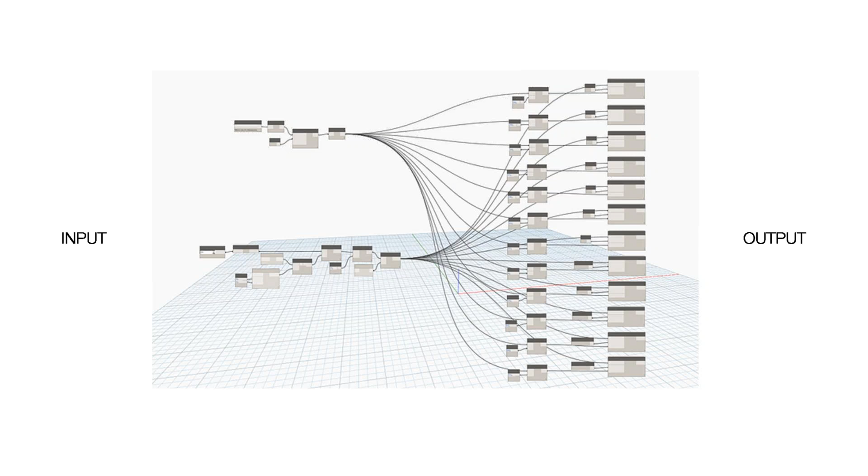So when you get to a larger graph, of course, your input then becomes the Revit model, Excel documents, whatever information you have, and then your output is actually probably the same thing, either Revit model, Excel - basically anything that can work with Dynamo is your input and your output.

So the first topic we're going to talk about is advanced strategies. This is one of our groups here. I think they're mostly in St. Louis. I don't think there's any in Chicago.

They are primarily focused on helping clients know what they want. They go in and interview everyone in an office, find out their patterns, and figure out how much space someone really needs - if they need individual spaces or if they need collaborative spaces. They go through and do a really, really good job.

Sometimes they're walking around a building once every hour. They have to get around the entire building, and then they make these giant graphs and all this fun stuff. They don't use AutoCAD at all, but they've recently started learning Revit, and now we're introducing Dynamo into that as well. We'll get into some of what we're doing for them.

They're probably one of our largest growing segments. I think two years ago they had probably two people, and now they're at 10 to 12. But then they hire temporary people to go out and do all the data acquisition. So when they have a job, they'll hire 10 people to work for two weeks.

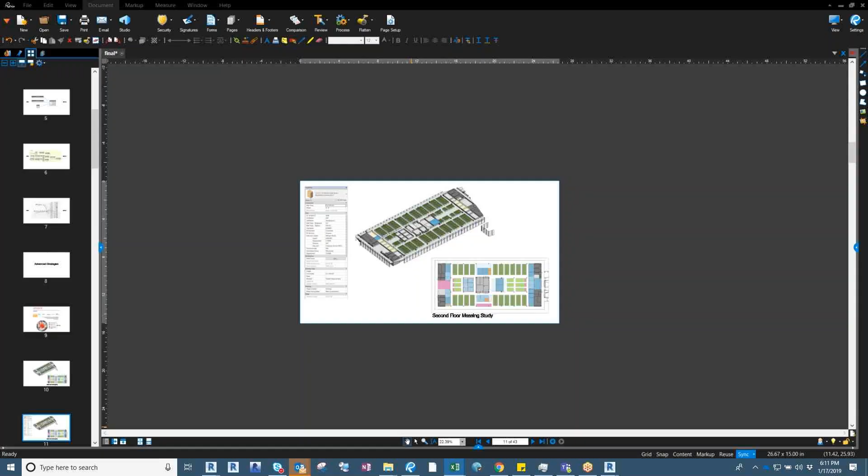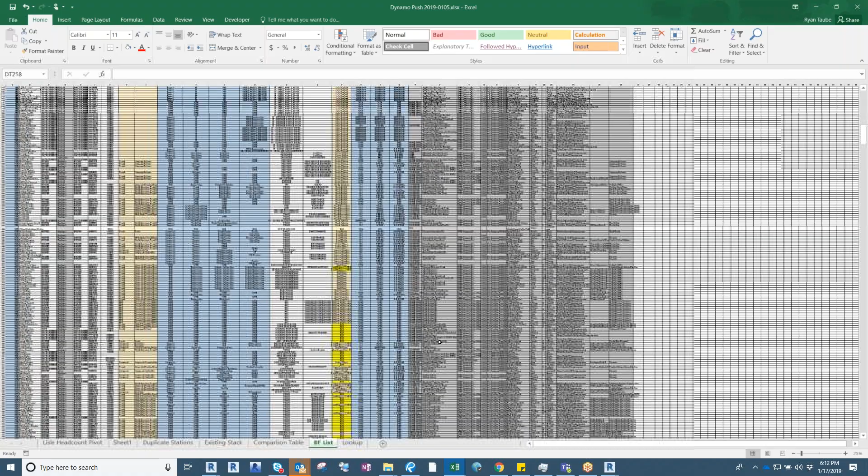It is super long. If I zoom out in Excel and get to the width, I still have to scroll quite a bit just to get all the employees for this. This information - I think on this one they hired about 20 people, and they went through and went to each office and typed in information on each person. So these are all temporary people that were hired to do data input in the field.

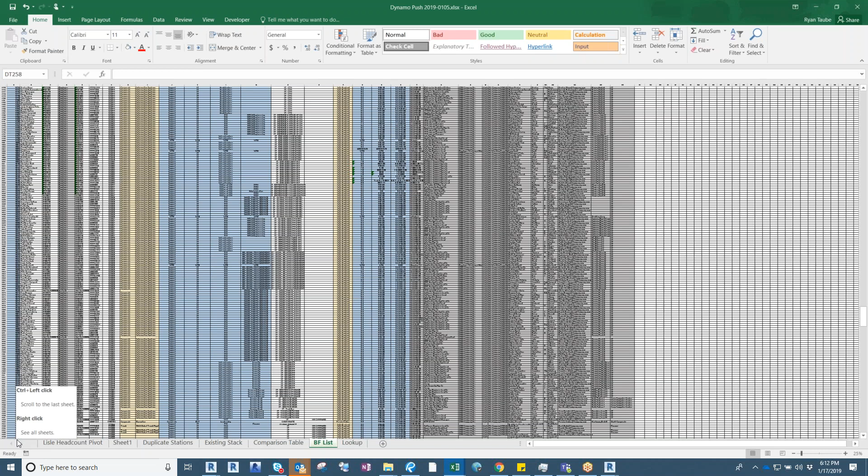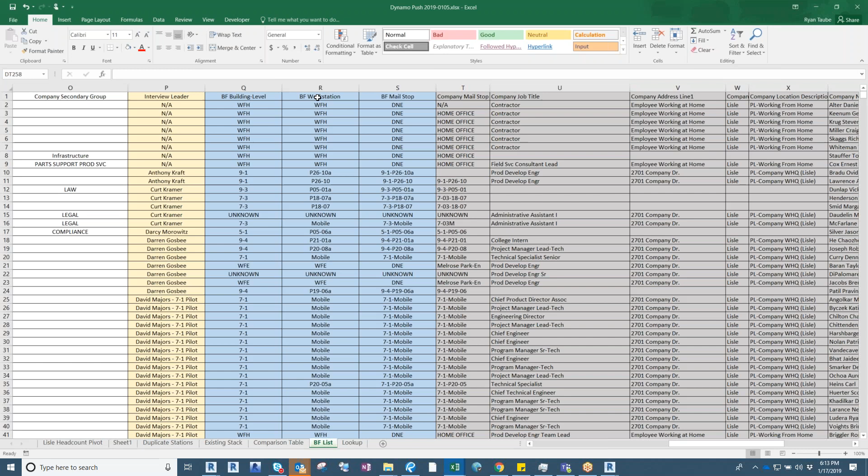That in itself is a whole different puzzle that I don't really understand, because there's a verification process and all that fun stuff. But at the end of the day, let me see if I can get back to my top here. So you have addresses and locations and interview leaders and building levels and business divisions and primary departments and all that stuff, which is a lot of data that you can work with, but it's a lot of data to acquire and a lot of data to work with in Revit.

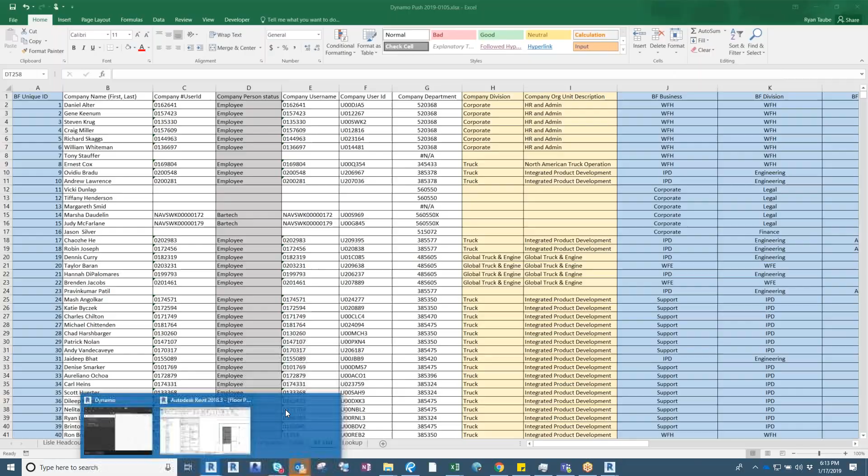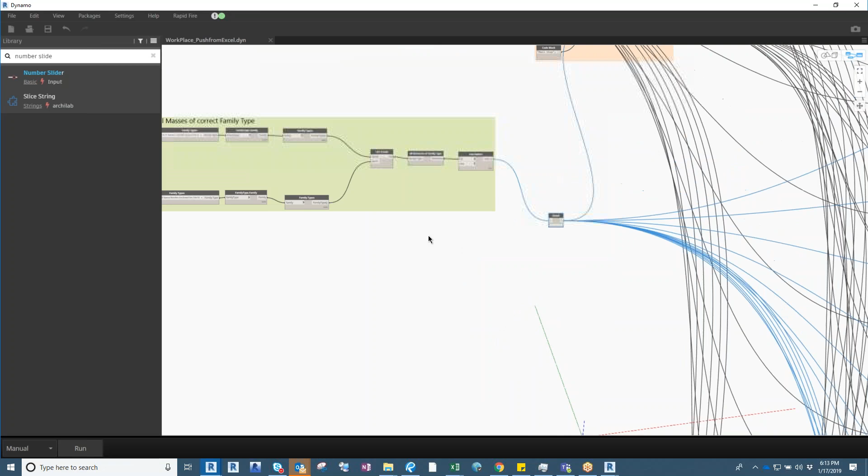So the Dynamo script is actually really light. We only pushed this much data - this is 12-ish columns that were from that schedule. And this is really my first attempt at learning where is it located...

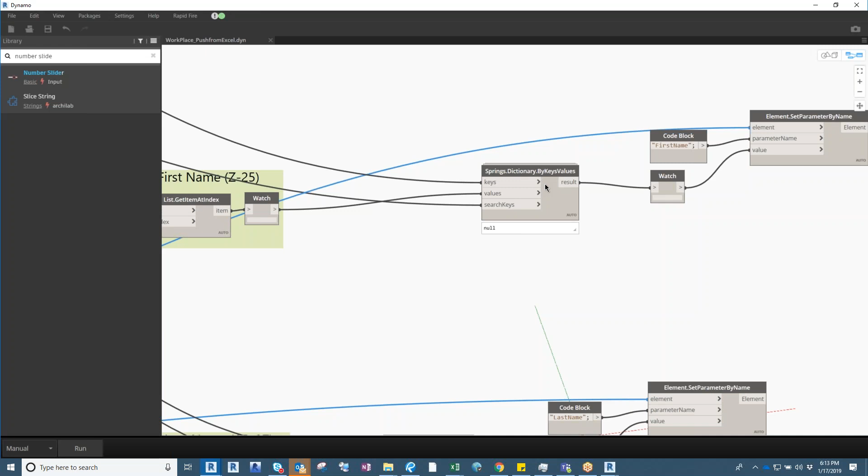Using - this is actually Spring Nodes, their Dictionary by Keys. If you haven't done Excel pushes to Revit, this is a really powerful node because all you need is a key value that's the same in both Revit and Excel. Once you do that, all the information basically flows through that key.

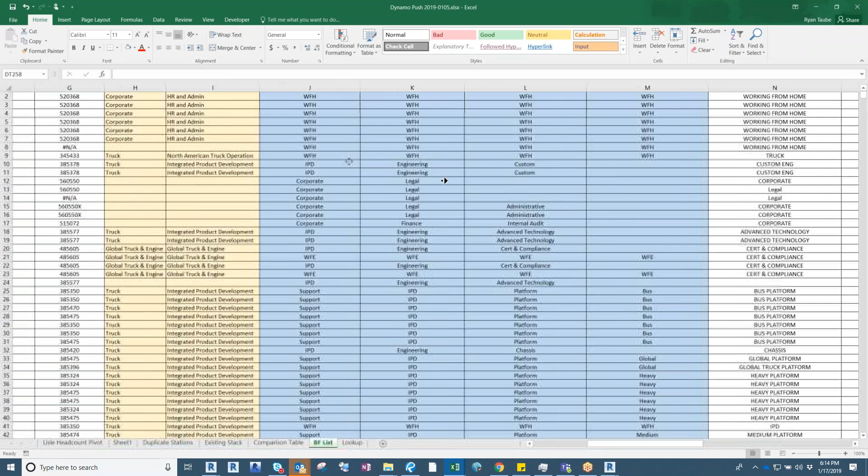So we had someone in our office that went through that - one of the things that was nice, there was a CAD drawing we could underlay, and it had all the mail stops basically. That's the unique user ID that we used - that was our key. And that key exists on the Excel spreadsheet somewhere - I believe it's this one right here. So that mail stop, it's something we created because it's a combination of building level and workstation. And we had a CAD drawing.

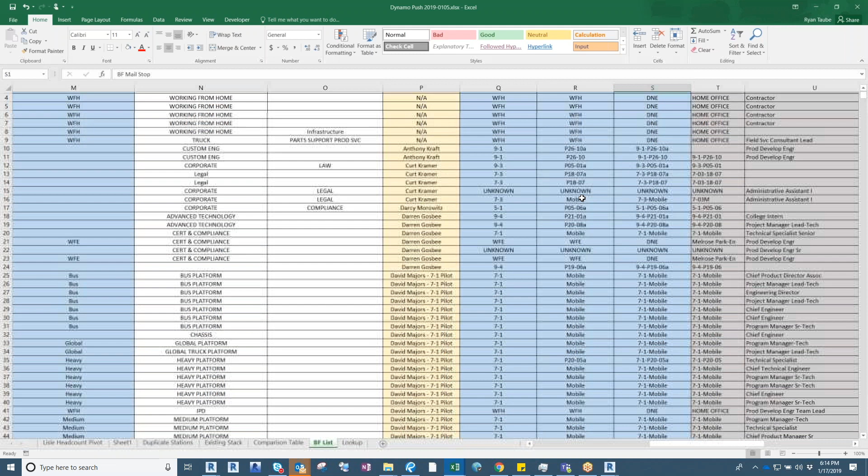So we created a family in Revit, and then... sometimes I get annoyed when Dynamo is always on top.

So someone populated one node in all these boxes and then pushed 15 other pieces of data into it, as long as they can get that one key connection.

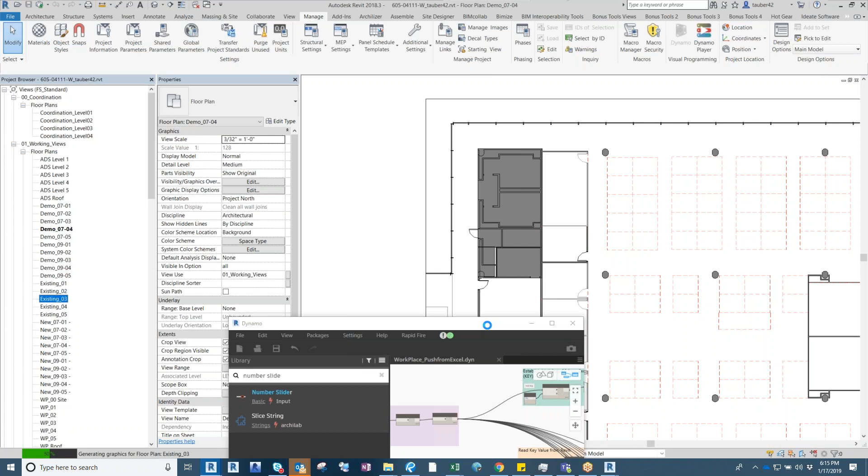For Revit, is this 1.3? This is 2.0. You have the Springs package in it? I have the Springs package in it, yeah. I thought that was, is Springs different than Spring Nodes? I think it's the same. I think Spring Nodes is the same.

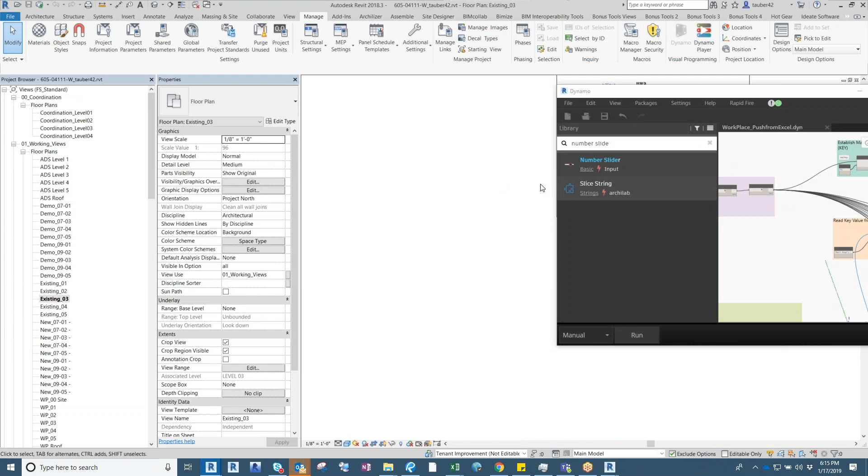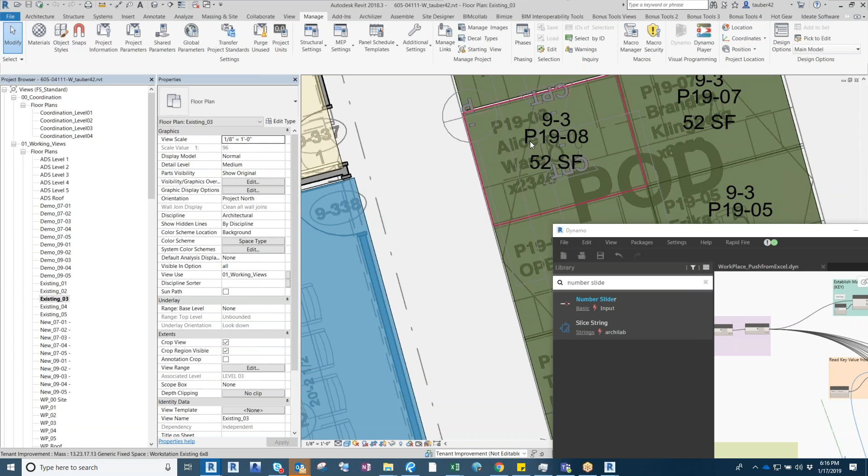Yeah, I'm having trouble navigating here, but it is just a massive amount of information. The CAD drawing underlay has their phone number, their name, and the mail stop, but it doesn't include which level they're on. So we had to first run a script that combined the level with the mail stop, and that created the official key.

And then from that key, we could start pushing all this information. So really, once you do it for one, you can do it for others. So this is all that you really had to do in Dynamo to push that much information in there.

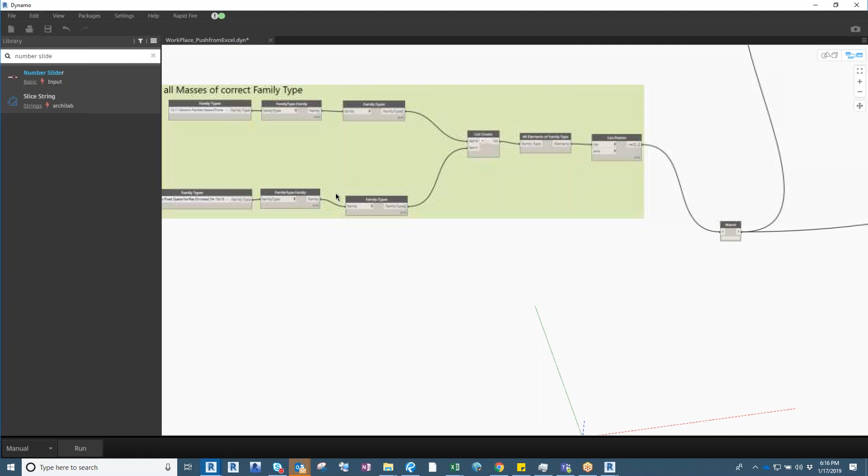So when I'm building stuff, I try to accurately describe what you're doing in each group. I use caps if it's an action, so like select, create, all that stuff for my groups.

Bringing data from Excel, again just some basic Dynamo stuff, and then acquiring the key that's in that Excel file, reading the key from Revit, and then pushing everything through this node. It just looks for the match, and then it loads the rest of the columns.

And that saved them. I mean, they probably couldn't even do this project otherwise. We kind of played with it on a previous project that had 200 people. It would probably take them a day of data entry to make a Revit model for it. So we'd actually played with the Revit part before, and they're like, all right, what are we going to do now with 3,000 people instead of 200 people?

So this is kind of the progression of how this process came to be. This is the first time this group of people used Revit, probably 6 months ago. They definitely never used Dynamo before.

The nice thing with having all these different companies working with us and various groups is that we can make inroads in places we would never really think about before. Even with our designers, they don't really use Dynamo right now because they kind of know what they want to do and how to do it. But with people that don't really know how to use Revit or Dynamo, it's an option, and then it kind of goes from there.

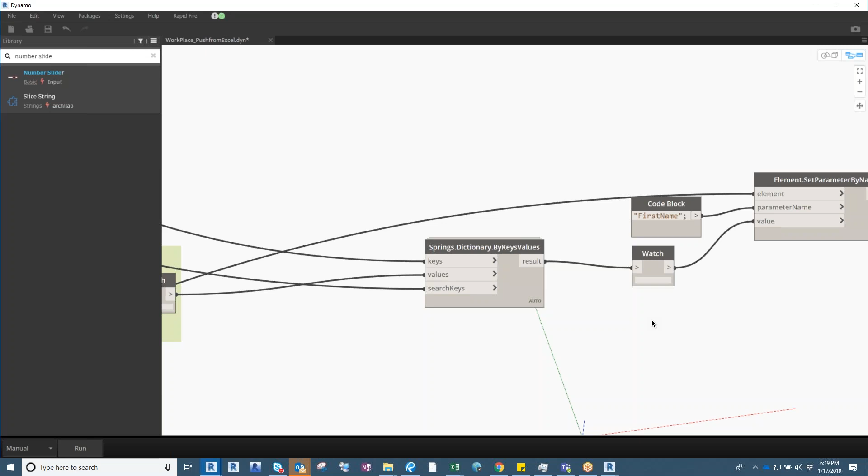I find Dynamo very helpful, and running scripts off of Clarity. You can run Dynamo scripts inside of Clarity on a regular basis to give you lots of information. The other thing we can start to do is tie that information to Power BI. So those are kind of the 4 different ways that we're using Dynamo at this point.

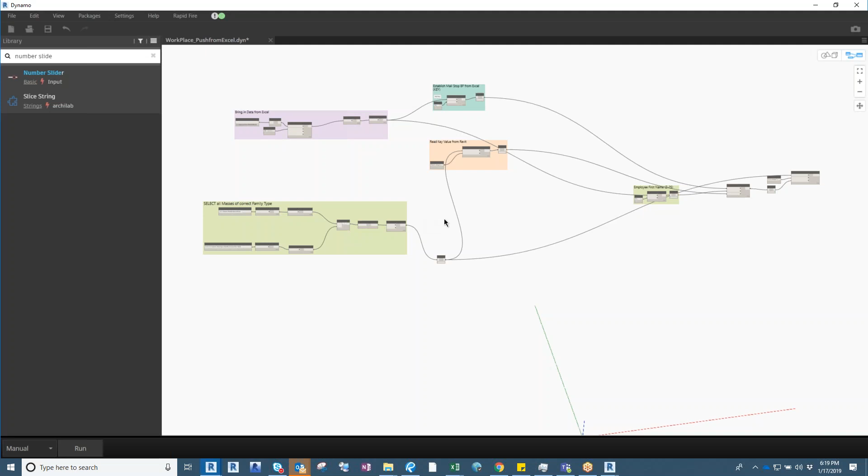So yeah, this is kind of a basic script, but it was a lifesaver. I don't think they would have been able to use it in the way they wanted to, really any model geometry, if they didn't have this.

Why do you have that watch node?

That's a good question, as far as organization goes. There's a way - we'll talk about it in the next script.

Watch nodes, and I also use code blocks to pass information through. Watch nodes are great because I can right click on this and freeze it. If I have a watch node where information is going through, I can freeze that watch node, and it basically freezes everything downstream. So I'll create pass-through nodes where all my information is getting collected as the input, and it goes through a block, then into the output side, and I can freeze that node, and it just freezes everything downstream. But if it's going into a group, you can't freeze that and control it as easily.

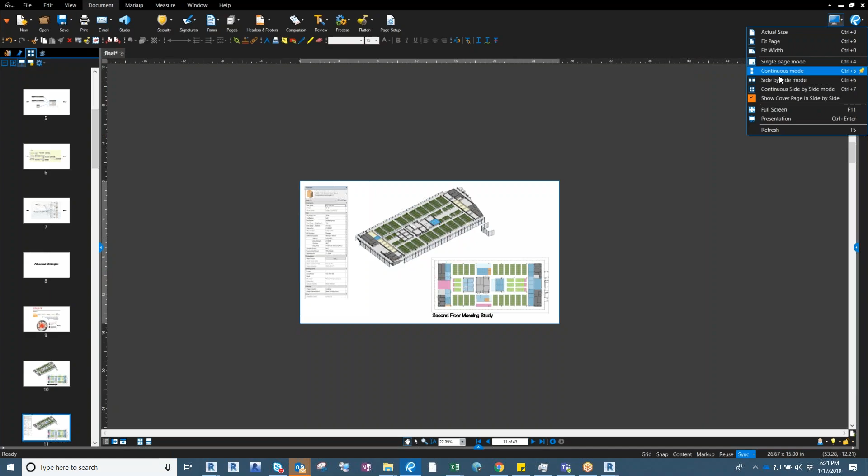So I'll throw watch nodes in, and rather than just have it sitting off to the side just to look at information, I'll pass through it so it stops things. I refer to that as an extension cord - if you think about an extension cord, you just pull the plug or plug it in. It's a convenient way, also really useful when your graph is really long and you're constantly scrolling back and forth to pull that wire from over here to over here. So I'll just put a watch or a code node, that's an extension cord to get that output to some other part of the graph where it's more convenient. For both of those reasons, it feels like an extension cord, like plugging your slides together.

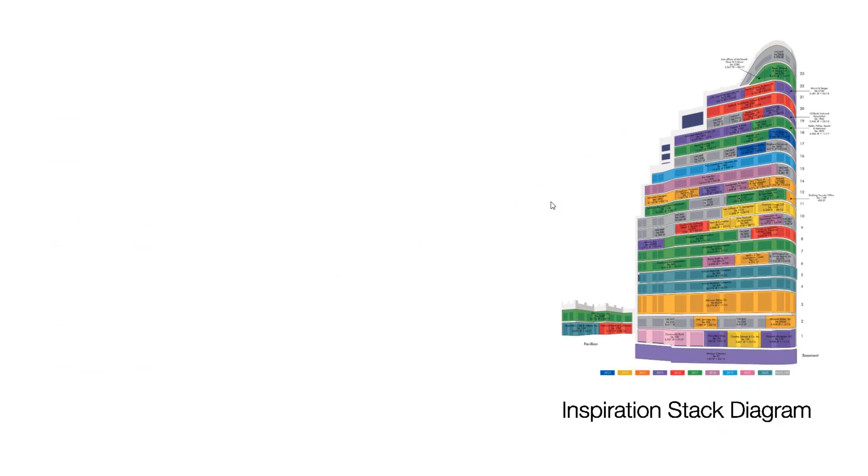So on this one, what was kind of the outcome or deliverable? Was it just a model with the data? Yeah, so it's model and data, and what they're trying to get to, this is like their inspiration - she's like, I want something like this, I want to see in color the different departments. This is not ours, by the way, this is inspiration.

What we actually output was some very simple colored graphics, because we're trying to acquire how much space people actually need, and then we could create other massing that equals that space. It's not quite as easy as saying, okay, we have 600 square feet of this, then go create me a box that has 600 square feet and place it where I need it to be. Basically, we output a bunch of information of what we had.

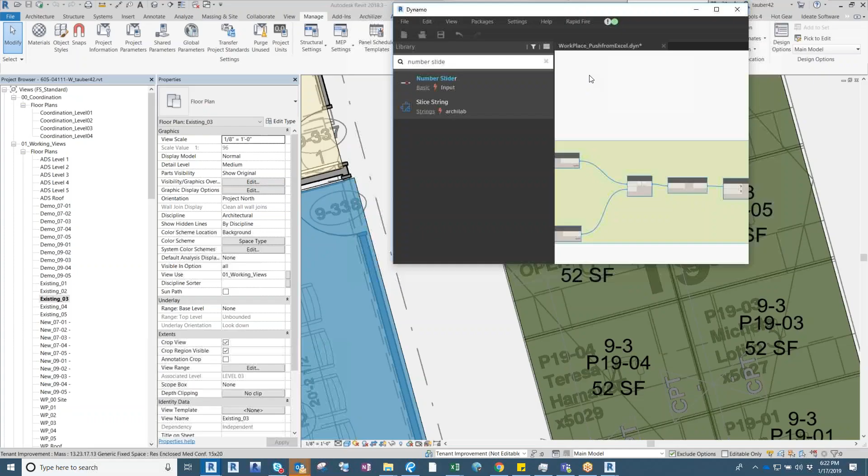If I go back to Revit, one of the big outputs was scheduling. So they had schedules - this is level 5, and here's the different space types, here's what type of room it is, here's how many of those they have, here's the family type so we know what the size is, and then the seat count. So some of these boxes had 4 seats in it, and how much square footage is in it.

Again, very beginner steps for people that don't really use Revit - they're still learning how to use it. Also, schedules is a really good way to introduce Revit to people, we'll talk about that when we get to landscape. With Workplace, or Advanced Strategies, it was a really good way for them to get some scheduling output.

They're very well versed on how to use VLOOKUP on Excel and pull that information, but learning how to do it in Revit and then manipulate things here is slightly different. They could do it a little quicker for some things in Revit, and then they do some things in Excel. Again, it's like pulling information from lots of sources and being able to utilize it.

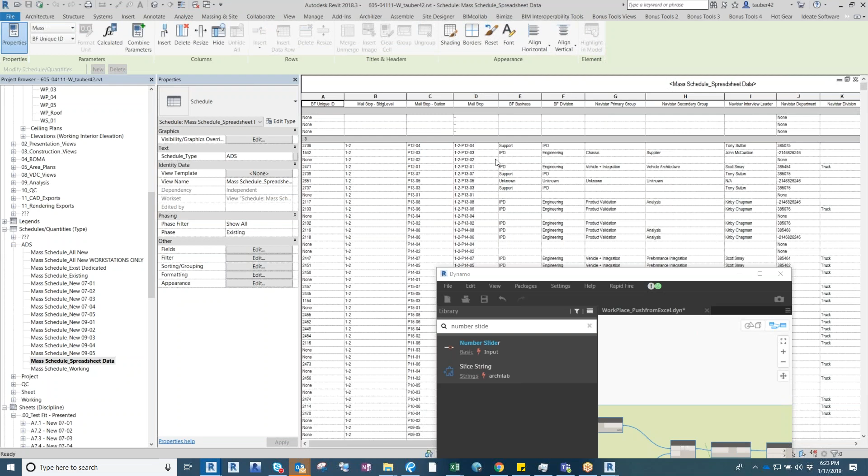Let's see if there's any other - how much of a time savings? I think with this, they couldn't have done it without it. Probably 2 weeks is what she threw at me, was the amount of information they would have spent doing it, and they didn't have that time. Their deadline was like in a week to do it.

So we spent probably a day trying to figure out how to get it, and then I told them what I needed. They spent a day setting up the Revit model to get those mail stops ready. Then while I was working on the Dynamo script, they gave me a temporary Excel file, and it worked on the first time. So that was actually unique for Dynamo.

How long did it take to run? It actually goes really quick, probably 30 seconds. So for 3,000 units, 15 bits of data, it was actually really quick - I was surprised. It's assigning parameters, it's not creating any. It was assigning values to parameters, not creating the parameters themselves.

So those were things that were already in the model. Yeah, so I went through and created the families that had parameters, so we had a whole shared parameters file for them. She actually now can create shared parameters.

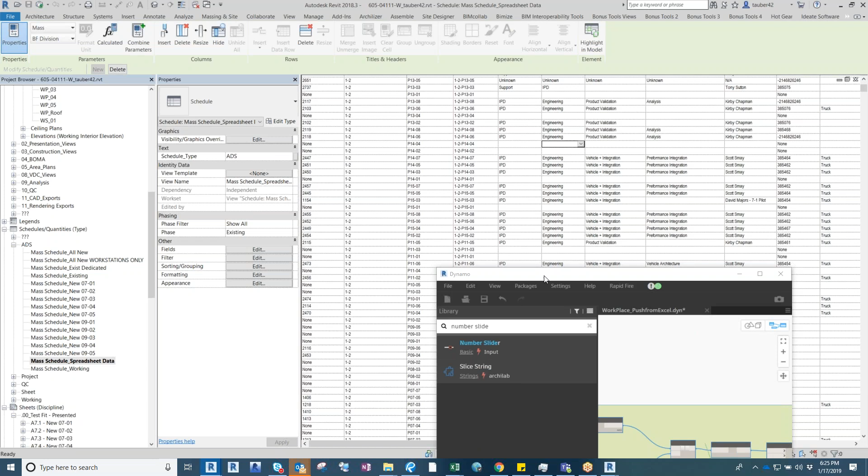So 2 weeks later, she came back and said, I've added these parameters, can we run the script again? So I went through and just copied this down, changed the column that we were adding, ran it, and it was done in an hour. From when she originally asked it, we had it ready to go. So it's now become a back and forth thing - we can add things, push it in. The workflow's actually pretty good.

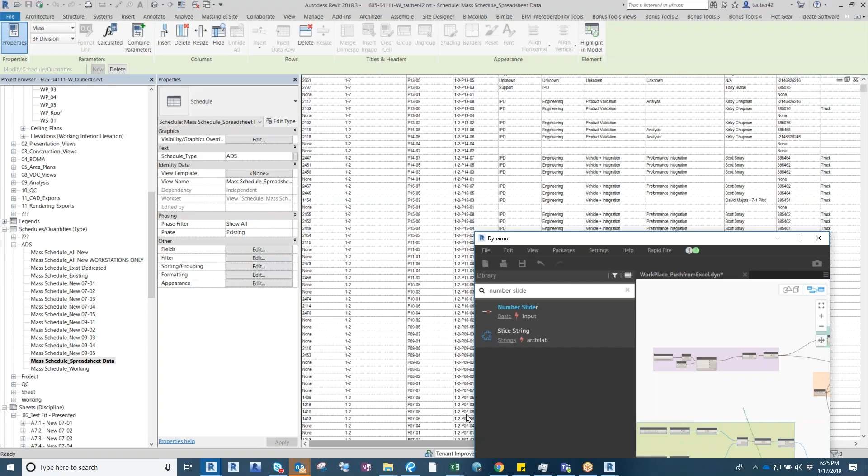So landscape, urban planning, these two are landscape. They do a lot of good stuff, a lot here in Chicago. This is actually Fort Wayne - we're doing a whole riverfront development. And as you can see, a lot of it is Photoshop coloring, CAD drawings.

And that's very typical for landscape across the country. We found one person that writes blogs on landscape for Revit, Lauren Schmidt, I believe. Very good tutorials - she presents at AU, and she presented at BILT this year, so I had a good chance to talk to her. Sophia, who's not here tonight, absolutely loves her, reads all her stuff, and Sophia has kind of been the driving force.

These two, Jesse and Jameson, are getting there - you guys are both using Revit. So we introduced Revit to landscape about a year ago, maybe a year and a half ago. Our landscape department is about 15 people, 3 here in Chicago, 12 in St. Louis. Historically, everyone's CAD, except for one person in St. Louis - he's been using Revit since I arrived about 4 years ago.

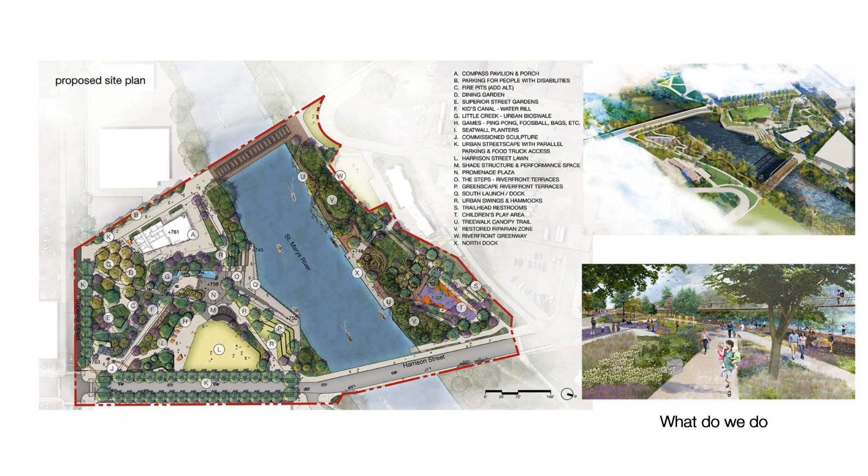We introduced it to Sophia and Jesse about a year ago when we were training Revit, and you guys fell in love with the scheduling, I think was the key. So we started creating templates and getting all that stuff to kind of overcome some of the hardships of using landscape in Revit. There's still some hardships with using it, and we're going to talk about our most recent addition to that, which I don't even think you guys are using yet, but we're going to use it soon.

So this is just kind of some examples - these are 2 different projects, but this is an actual Revit model and then taken through Photoshop. This is kind of how things look in Revit. So if there's a shrub or something, we'll draw some floors, we'll get the right height in there, and then we'll offset it to kind of give you a rough estimate of what things are going to look like. We don't really have 3-dimensional trees yet, although we've been talking about getting some things - we can kind of talk about that in a little bit.

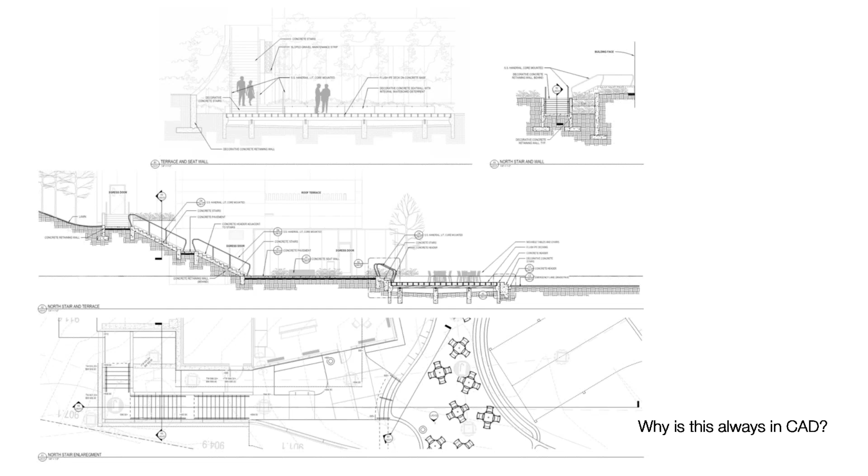Yeah, so one of the big challenges is that it's always in CAD, and it's because we have a lot of details in CAD. I think landscape people think in CAD a lot better. The GIS is obviously a CAD-based program, and everyone has a lot of knowledge with that. And what we found is quantification is a lot easier in Revit.

So counting trees, counting areas of floors, obviously - we do all of our sod and shrubs and basically all of our smaller plantings as floors. We're not quite to the level of Lauren Schmidt where we are using Dynamo to drape floors over topography, but we're getting there. I think as soon as they learn Dynamo, then we're going to get there, because I think Sophia's probably going to try to start learning that soon, but that's a little bit more complicated. Right now we're just doing flat floors and trying to get the heights right, and because we also have soils and irrigation and all that stuff.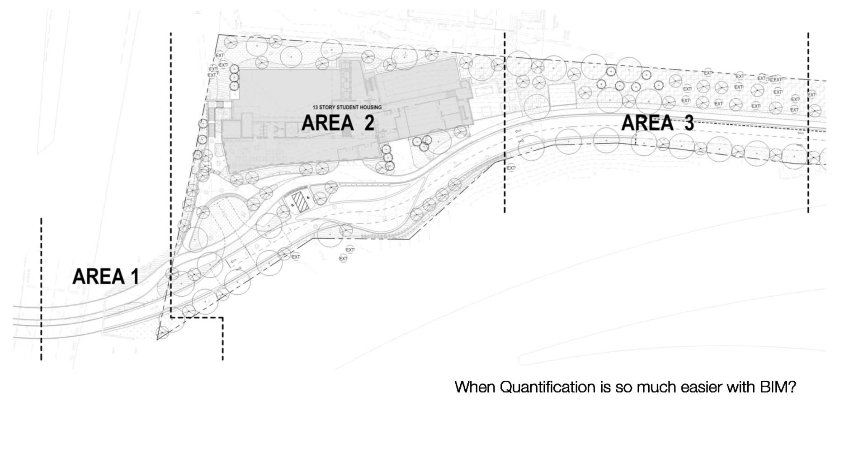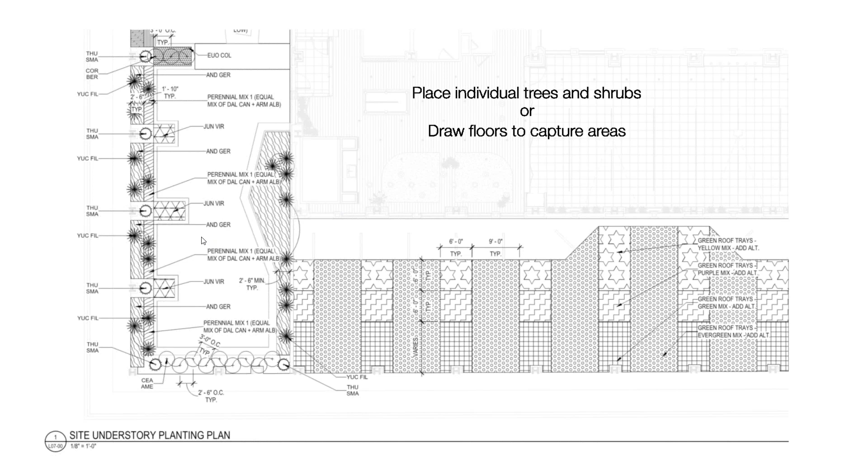We're not doing layers within the floors - we're actually doing separate floors. So if a soil is going across the whole site, we'll just model that whole thing rather than try to build layers within it. And we'll kind of see why here when we get into the Dynamo script. But yeah, we're scheduling things, quantifying individual shrubs and trees, and then drawing floors to capture those areas.

But what do you do when you have 200 plant types and you have to create a floor for each, or you have a bunch of different shrubs? Do we build a template with all of those already pre-built, which is kind of what we had started doing? And the problem we had was building it for each project, where we would import the different symbols and botanical names, cultivars, common names. I mean, there's a lot of information that goes into landscape design.

And just to show you one of these folders that we have, these files, we have a master list that one of the guys in St. Louis has been kind of building his entire life, that we've now taken and expanded upon.

There's different types of the same thing with different cultivars, different common names. They all have a height value, a spread value, and spacing. When you're doing areas, you kind of need a multiplier. If the spacing is one foot on center, then your multiplier is 1. That makes it easy. So if we can have that multiplier in Excel, then we can maintain consistency as people start modeling this in Revit.

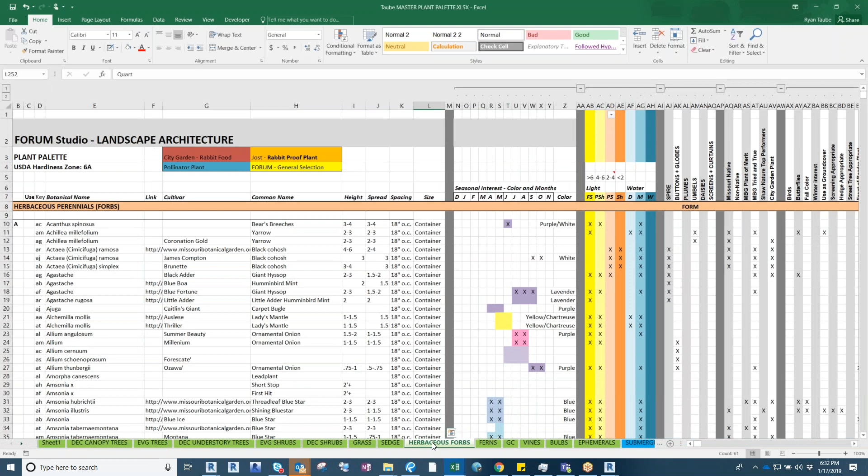But one of the things that we also have, let's go back to the canopy trees, is that this is expandable. So we have the time of year and what color the tree is at that time. It's insane how much information's in here.

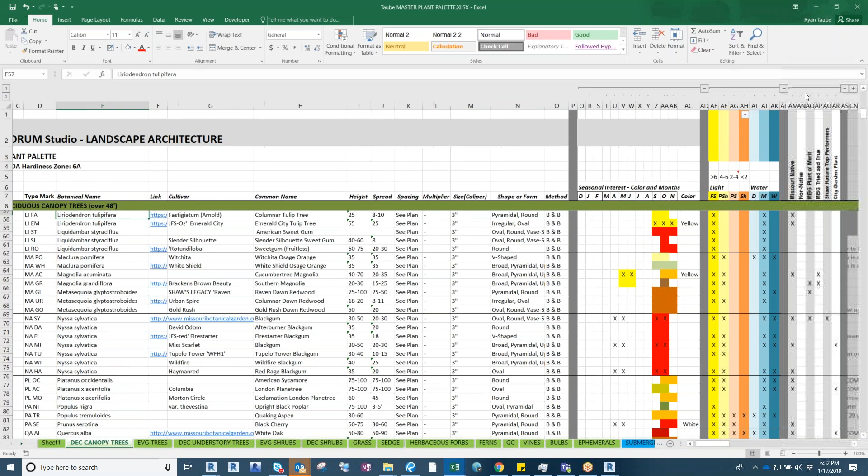This is like the water usage. Is it partial shade, full shade? And then we have just lots of little bits of information. So is it Missouri native? This guy was based in St. Louis. Is it good for birds and butterflies?

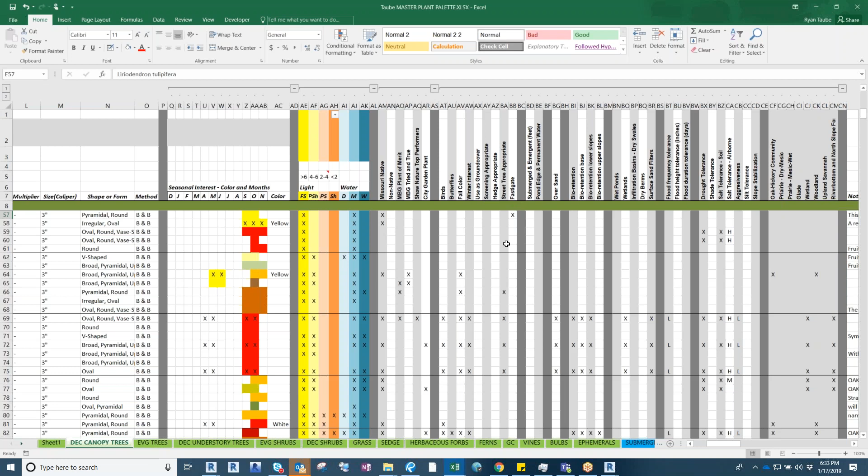So like stuff they'll look up and stuff they kind of want to review as they're picking trees. There's a lot of information here. Now, what I'm using it for really, I only need this information, because this is what I'm actually pushing through. But maybe down the road we'll use the coloring and that kind of stuff for something else that we'll talk about in a second.

This is probably the biggest reason why landscape architects don't love it. To build all that from scratch takes forever. Yeah, it's just absolutely forever. I mean, there's a lot of research.

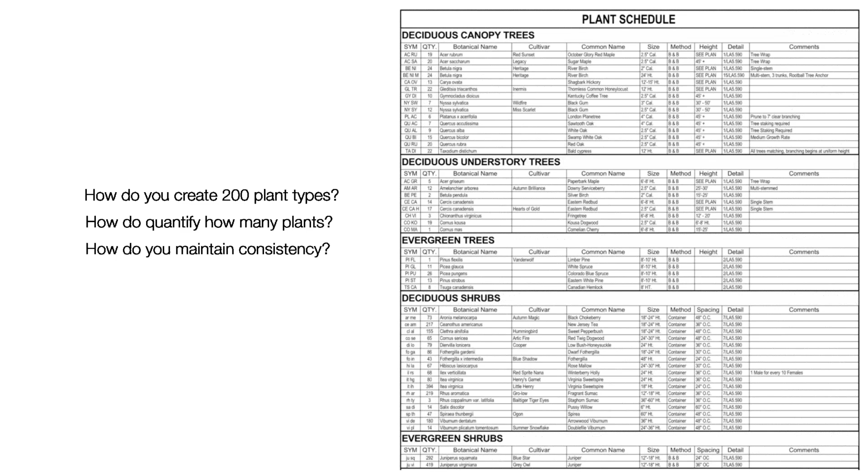So yeah, there's a lot of information here to utilize, and how do we utilize that? So let's get this back up. Yeah, consistency. So if we're inputting things in Revit and you misspell something, that's an issue. So if we can push this information in, it's obviously going to maintain consistency. One of the other things that we had, the consistency and all that stuff, I'll jump into Revit really quick and show you actually what's being the result.

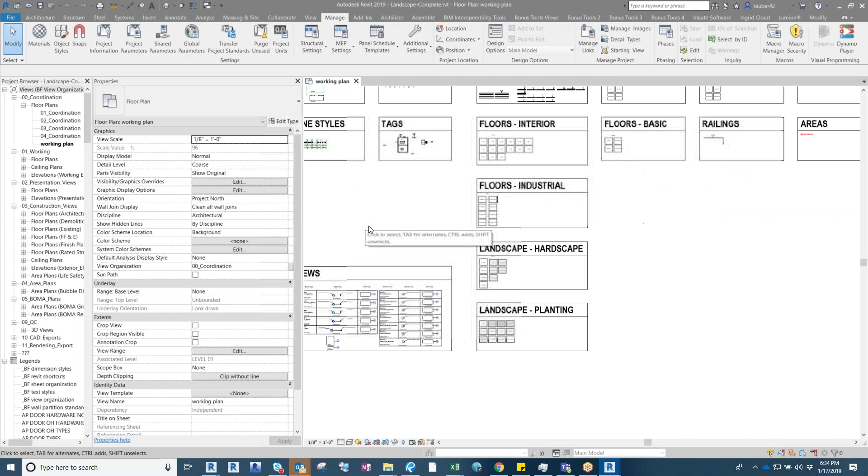So this is a look at our 2019 template as we're kind of putting things together. So we'll have all of our floor types. This is probably going to get parsed out into different templates, but I'm just trying to keep everything together. So annotation, symbols, all that fun stuff. The focus of this is on landscape.

So we have a floor type for annuals, bulbs, vines, shrubs, ornamental grasses, sod, perennials, and planting mixes. So they each have different hatches. So when you model them, you can get a site plan that you can differentiate and tag and get areas from.

Let's see, 2019. The script that we ran is a little bit different because it's just reading from Excel and then bringing information in. And it's asking which plants do I want.

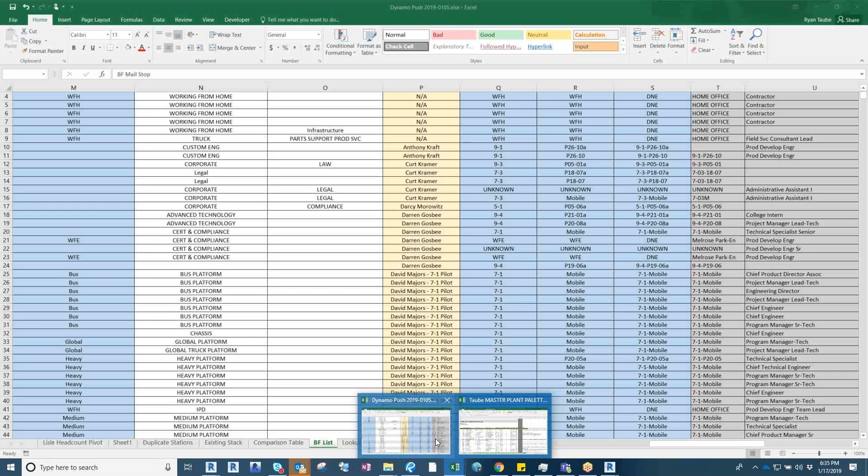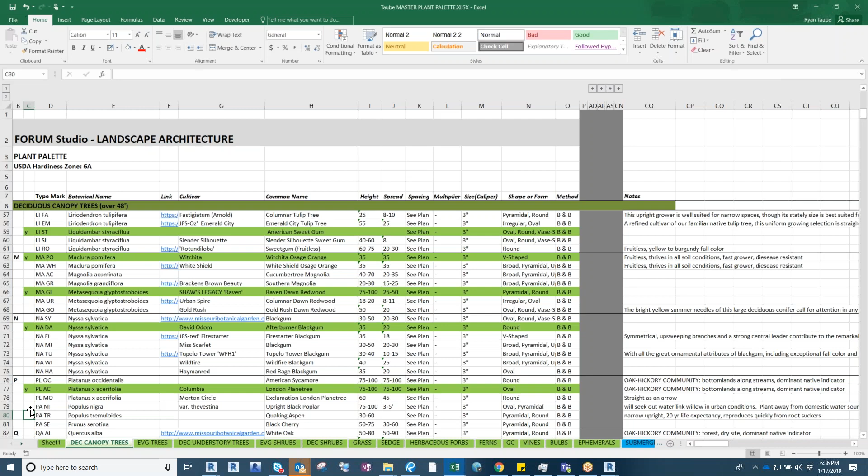So the goal that we're going to have is that I come through this list and fill this parameter in and say I want that plant and that plant and that plant. And in Excel, it's highlighting so that you can visually see what we want. I already have some selected here. So they just turn green for what we want.

And then when we come over to Revit, it's going to duplicate an existing generic floor and then create another floor type and push all the information from that Excel sheet into it. So it gathers the data from the type mark and it's filtered based on that yes parameter, and then it's creating a new floor type, duplicating from this one.

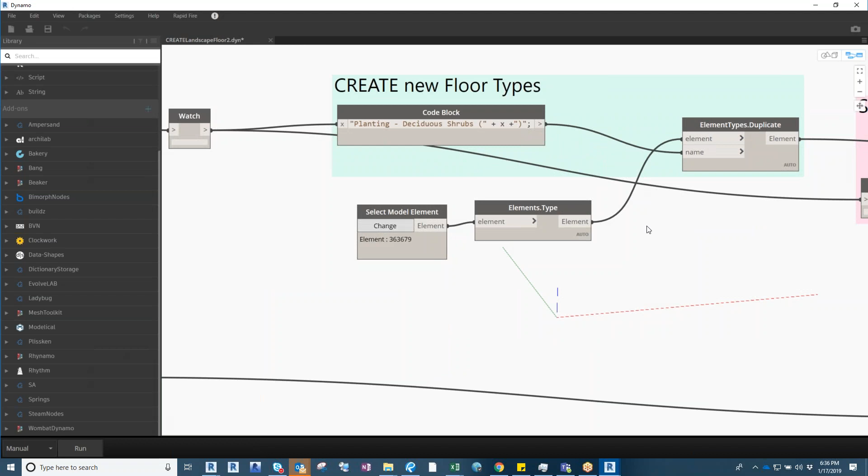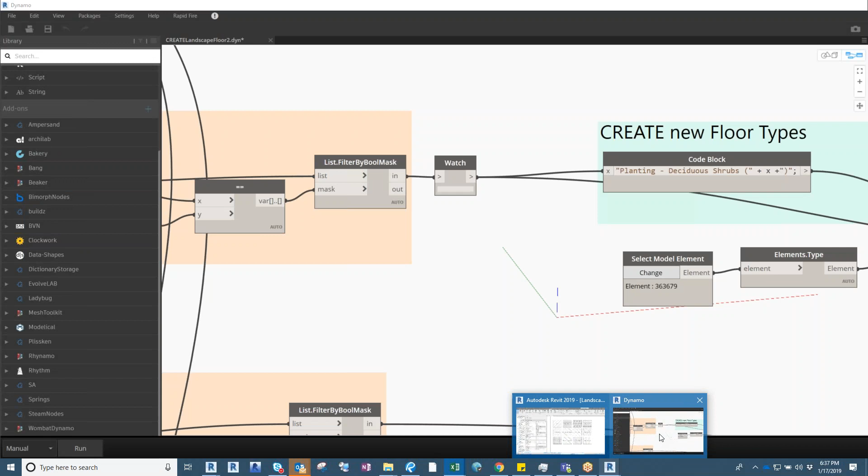I'm working with how I want to duplicate - right now it's just select element and duplicate that, and I'm using this to rename it. The type mark is just this value here. Each plant has a unique value, which one of our people, Megan down in St. Louis, went through and filled everything out, so everything has a unique value. Typically it changes, but now we can have standardized naming, so it creates a floor type and then sets that as the type mark.

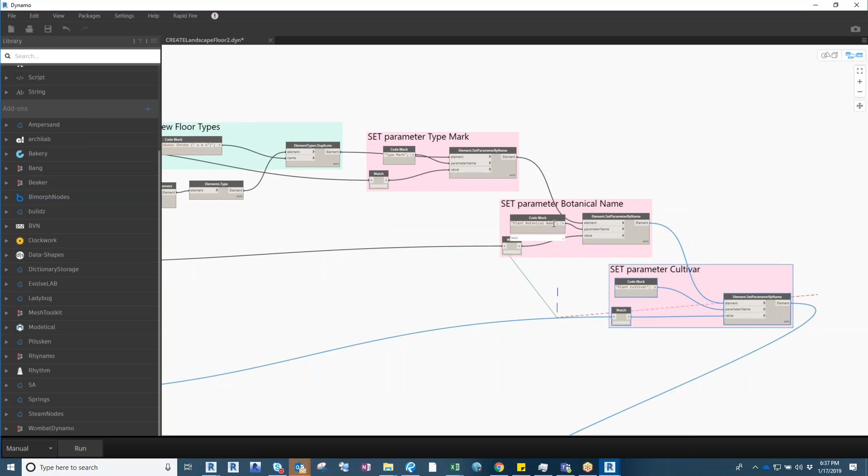Maybe I can ask a question to you guys - when you're putting information from multiple locations into the same object, I'm passing through, so it's kind of doing this. I don't know if the information can split and go faster, or if it should go sequentially. What I'm doing is setting the type mark, and then that element is setting the botanical name, then setting the cultivar, common name, height, and the method of installation and spacing.

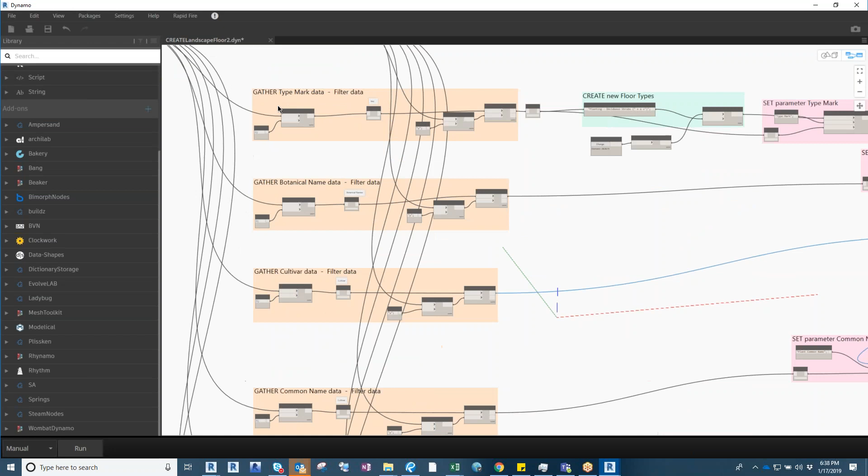We could, might be able to build a list - yeah. So we're gathering the data from Excel, basically filtering it. My list management skills, I would say, is intermediate at best, so that's kind of why my scripts balloon out and then they go forward that way.

Yeah, the only challenge with that is when you have to go back, now all these other ones that you copied have to be updated too. Right, yeah, so I'm still working through it. I'll learn some stuff and probably completely redo this in 6 months. Who knows? That's just the way Revit or Dynamo is - you just kind of, I think every time I open a Dynamo script, I look at it and go, what was I thinking when I put that together. We'll talk about that in the next topic because I completely rechanged it.

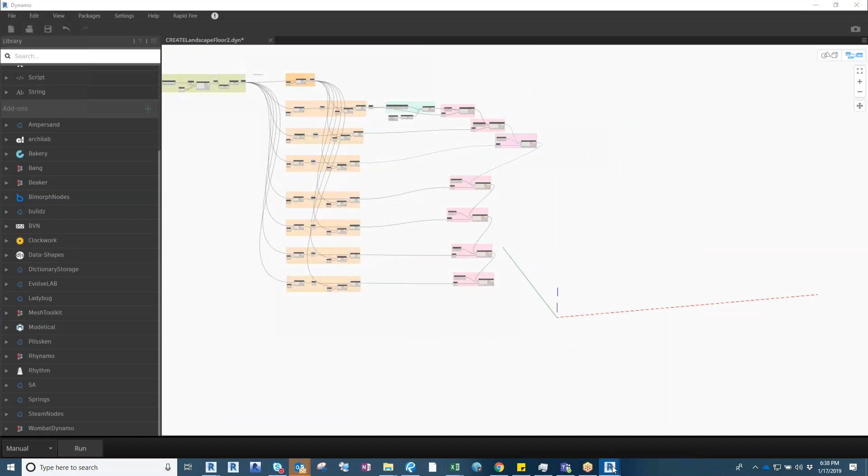So what this does is it pushes all this information - when I ran it, it took the deciduous shrubs and created a duplicate with that information. And if I edit type, it's got all these pieces of information, if it had that information filled in in Excel, but it keeps the same hatch for all deciduous. Yeah, so deciduous would have the same hatch, and herbaceous forbs would have the same hatch. Yeah, that makes sense because you run out of hatches pretty quick.

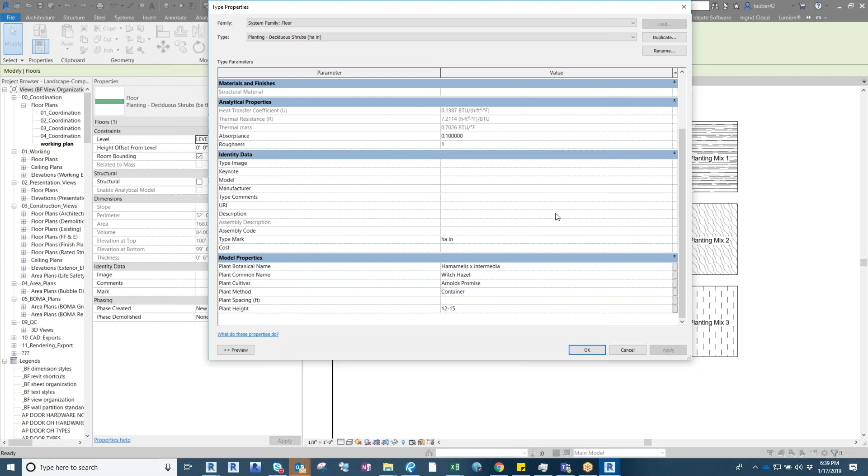Right, yeah, so one of the things we do have - I'm just going to jump into this. I have to step on... thank you, I appreciate it.

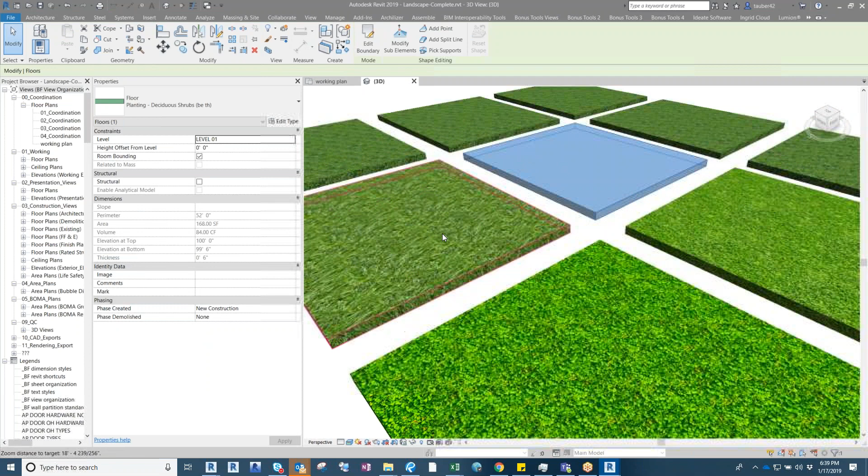One of the things we're kind of playing with is having different materials on it, so the shrubs are a little bit darker, the grasses and some sod, and then the rest are just a generic planting thing. As we evolve, we'll probably update, much like the Excel file is kind of changing over time, we'll probably change this over time. I also don't want to overload the template with 50 different JPEGs or whatever.

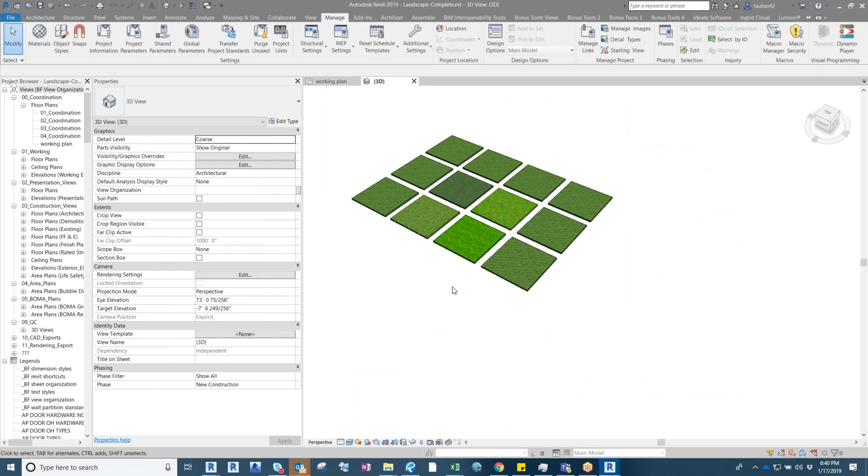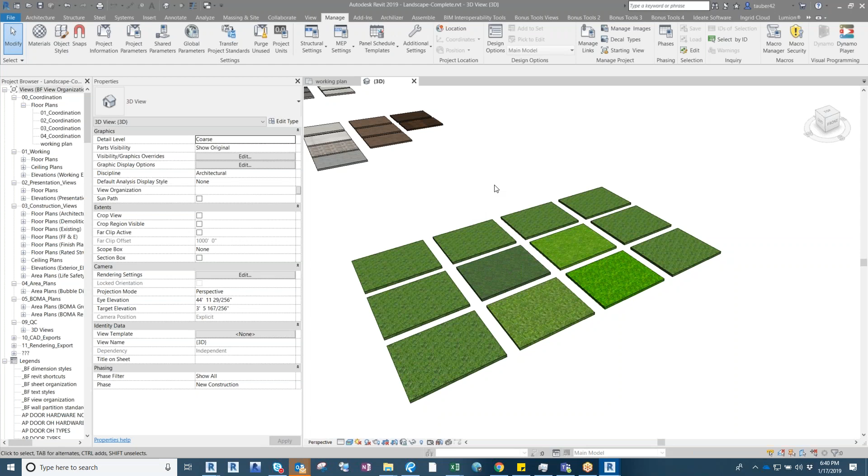So you said Lumion covered that? Have you ever tried to integrate Lumion with this? Not yet, just because this computer and Lumion don't get along too well. I have a tower that I'll play with, but I haven't really gotten there yet. We have a couple other people that use it a lot better, so usually I just give them the task of doing it rather than doing it myself. I'll play around with different tools, but then I don't really utilize them all the time.

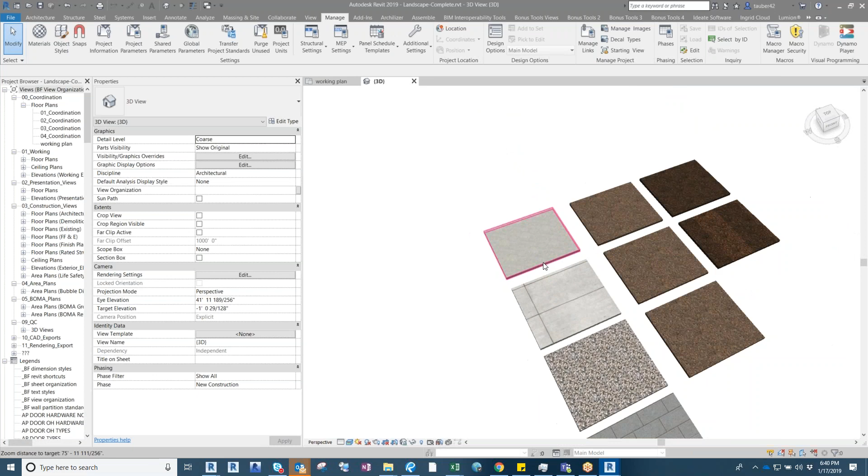Also, one of my favorite things with 2019 is that perspective, that full screen perspective. And have you played with the new materials at all? Yeah, I mean, I always try and use them now. I'm trying to use them, but there's not a lot - like, not a lot, you can't really create it from scratch either. Well, yeah, they use different - yeah, I agree, it's different. I try to use them, but it's still not quite all there yet. But that's changing soon.

So that's where we're at with landscape right now. They're going to start using it hopefully soon. And then, the question I always have with Dynamo is what can we do with it now? Like what's the next step? Can we take this information that we have already and push it even farther?

So this is an example of a situation we had with a client where the client didn't understand that leaves change, that colors change, that they're not going to have red flowers in the fall when they're there in the spring. So you guys put together like 6 or 7 different renderings at different times of the year, and basically went through and photoshopped a lot of stuff. So this is a great example, and it's a pretty awesome job.

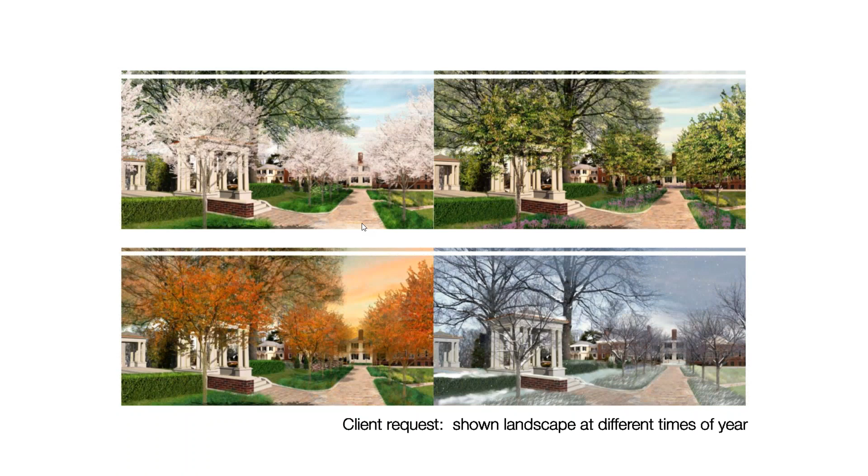So different renderings, obviously spring, fall, winter. Just to kind of show you, and hopefully she was satisfied. I'll go back one.

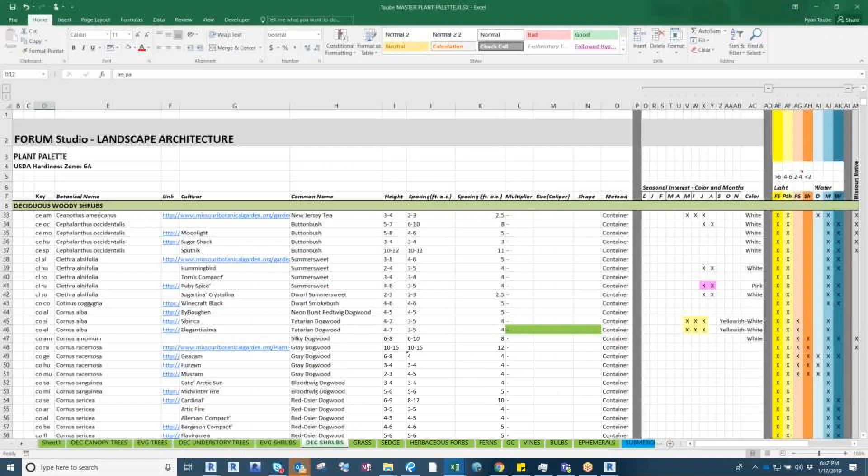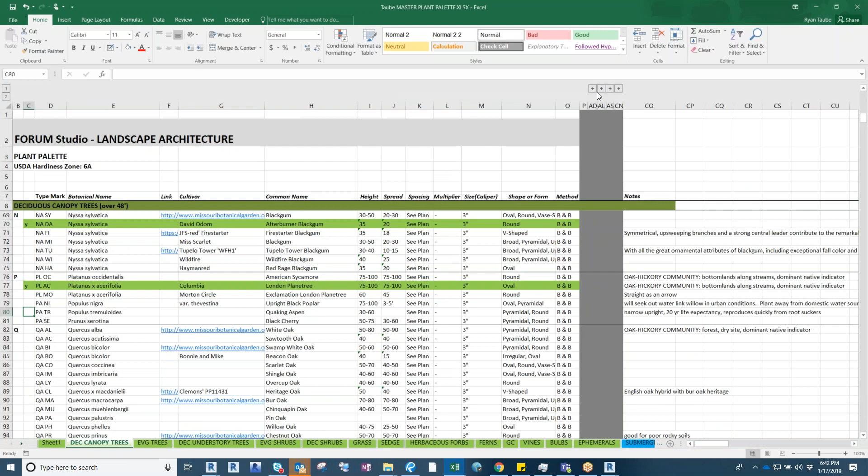So what obviously that color came from is some of these colors that were in here. We're gathering a lot of this information - there's colors obviously for all of them, but a lot of it's in your guys' heads. So Megan's trying to go through and put stuff down into this Excel sheet. She went through the canopy trees and has added it to all of them and what times of year they have. So my thought process is, we have all this information, can we do anything with it?

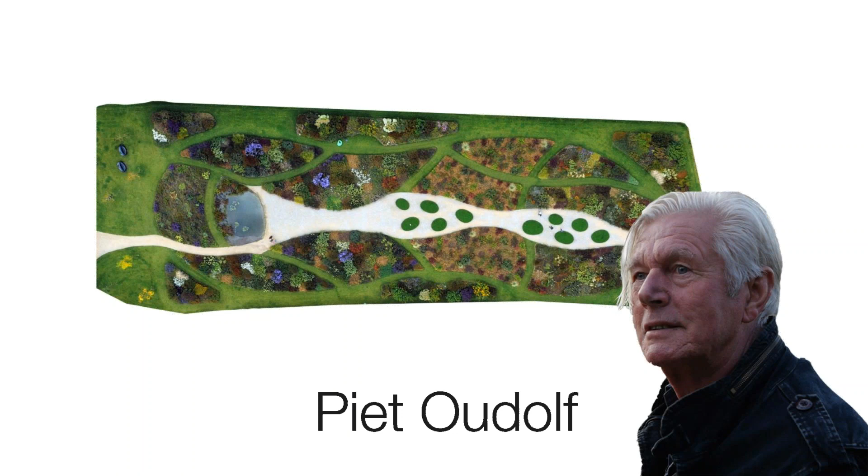And he did the Lurie Garden here in Chicago as well. This is like, what's it called - the Salvia River. So it's like a river of purple that's running through the green. He's got a lot of cool stuff and really interesting layout design.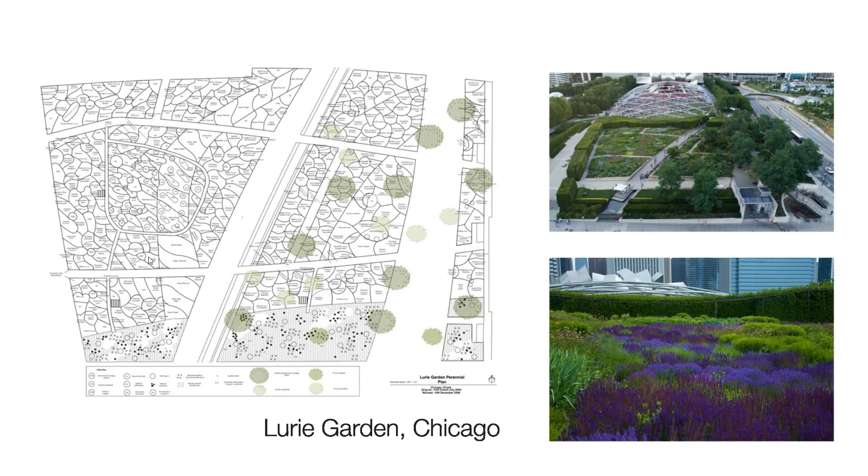So has anyone heard of the Voronoi diagram? If you've seen the map of the United States where all the points of the capitals and distances from the capital - basically it creates spaces where everything inside of it is closest to that point. So as the points move farther apart, the spaces get bigger.

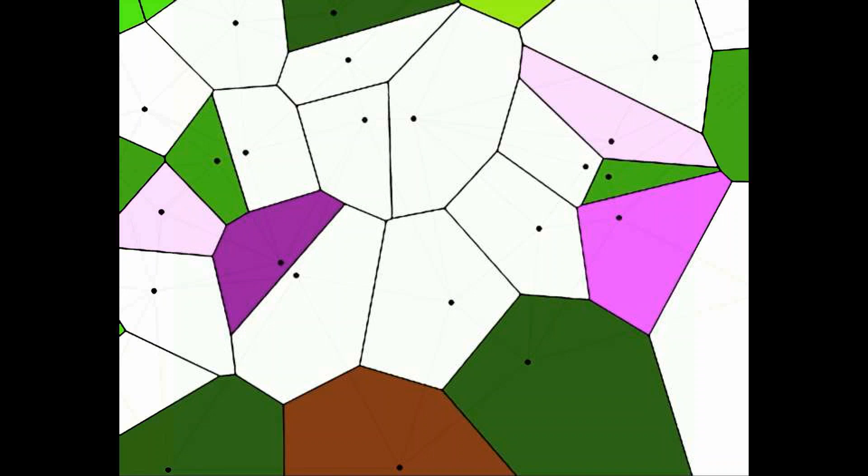So what I took that for is, what if we take the information from the Excel spreadsheet and created an abstract Voronoi diagram that uses the colors of those shapes and then changes colors throughout the year - it'll just fade in from one to another. This was not done in Dynamo - I just used After Effects and kind of punched in a bunch of colors. But you could create these abstract stained glass stuff using square footages and stuff. So that's kind of like my next thought of where we could take this information.

Who knows if we'll get there, but I just thought it was kind of fun to play with. Let me just make sure I got enough time - 15 minutes to go.

Kind of like a heat map, yeah. So if you look up Voronoi, like create Voronoi diagrams online, you can actually get interactive diagrams that you can play around with.

Would you just do like a random scatter to generate points? Yeah, like this one will create a random scatter, and you can actually start moving things around, and it will calculate everything in there. So it's just something that was kicking around in my head as a way to generate some interesting shapes. And Dynamo has a Voronoi node in one of the packages - I don't know which one, but I'm not very good about putting that information down, even though I should be.

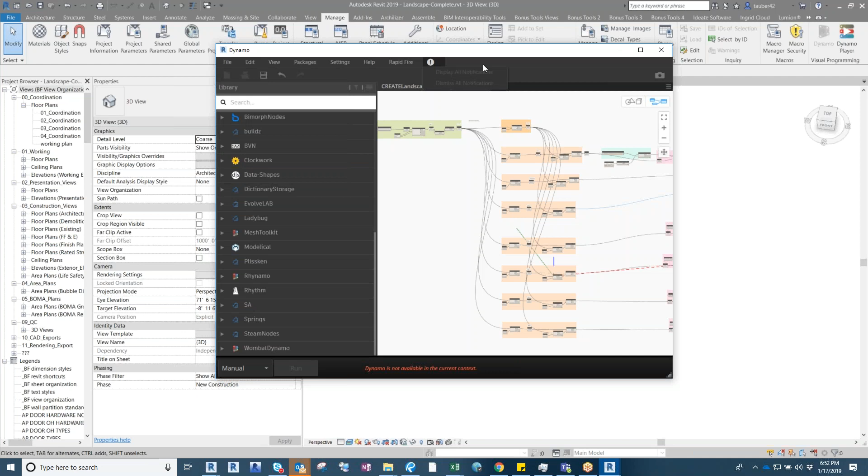Because there is one - can I not open anything? I have a feeling something's off screen. If you change your Revit file, it doesn't let you close anymore. I don't know why. We'll just restart Dynamo.

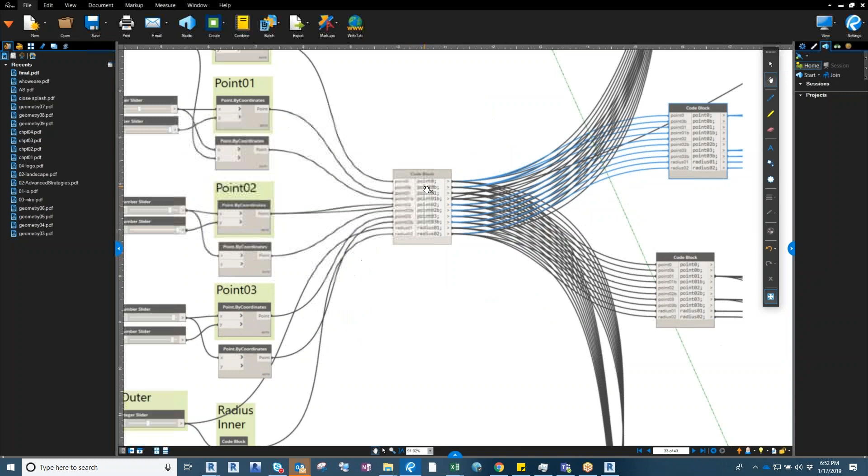So what it does is it collects all the points within here. Then I could copy that code block and push it right next to it, connecting all the points again. I could copy this back and forth and drag it to where I need it.

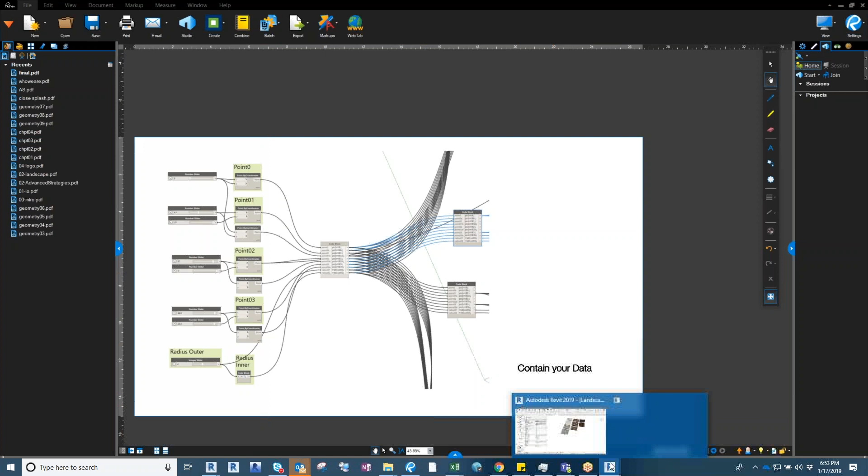So I don't have all these lines going everywhere from all of these points, because it's really confusing. If I can drag this code block up to my linear progression of groups, it makes the lines run that way rather than running all the way through, and I have no idea what's going on.

Yeah, so that's the extension. I call it zip ties, because that's basically what it's like too, yeah. That looks just like your network closet. Yeah, that's exactly the analogy I use.

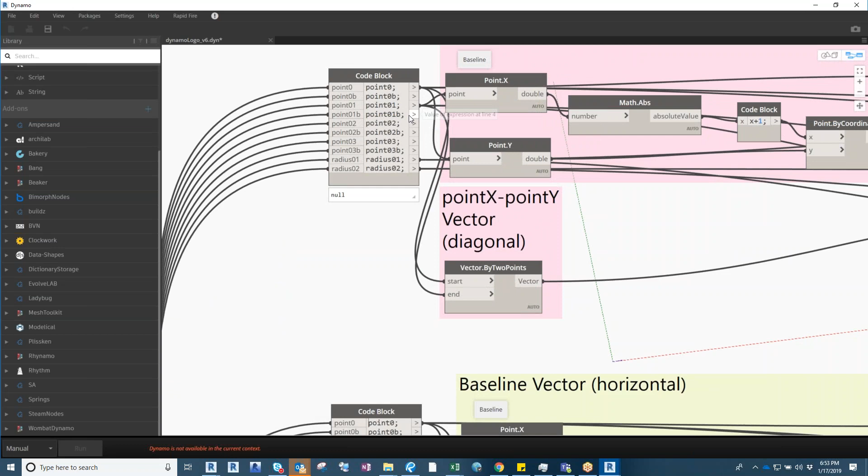So this guy right here is exactly the same as this guy right here, and then I'm just using the points that I need from it. I'm not using everything in there. This one uses different points, and this one uses different points.

I'm actually going to open up... yeah, we can come back to this, because that was a more advanced one.

So from there, basically you're solving for 2 points, then solving for the lengths of the line you create, and there's a node that's angled by law of cosines. In Dynamo, if you just search for it, you might find a node that solves the problem you're looking for. So I typed in angle and scrolled through the whole list trying to find something, and this seemed to be what I wanted.

So then I went back and created how I wanted to find these 3 points, and from there... there we go. From there you start doing a bit more geometry, and all these angles are the same.

As the line rotates up, all these angles are basically staying the same, just because I can't remember the exact geometry law that's doing it. But it's kind of one of the things I was talking with my dad about—this is how things are moving, but they're all staying the same.

And then from that, you're taking this point and creating an arc by center point. So it starts at that point, it has a radius that we defined earlier, and it has a start point and an end point.

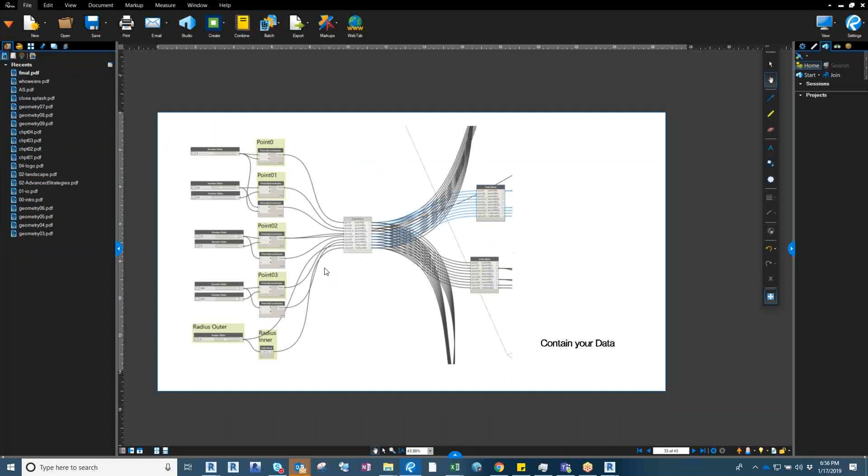So if I go back to Revit, you'll see that's a little bit different. I found a node that's vector by 2 points, and then vector angle about axis. This got a little bit cleaner instead of having that giant mess.

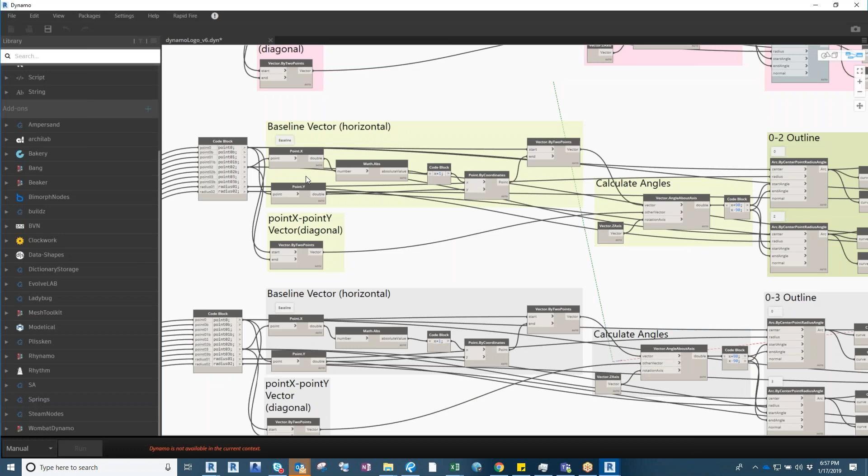Let's see if I can go backwards. Instead of having this big setup, it's a little cleaner with these. I basically created those points and then found it, and with that I could flip it all the way around and do 360 degrees.

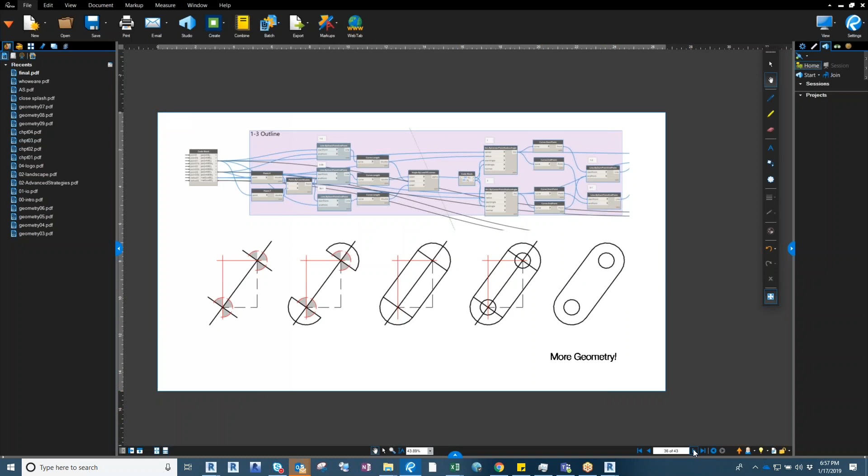So the next step, which I can't remember if I have in my presentation—I'm finding it's better to do everything in PowerPoint than in Dynamo, just in case things crash, but we'll see.

So this is the redefine. Instead of this, I had this. What I was finding with the original is I had to specially create this node for each box, so plus 180, plus minus 270, whatever. Whereas this one, it's plus 90, minus 90, and it always works, just in case we're flipping, and this is the angle going all the way down.

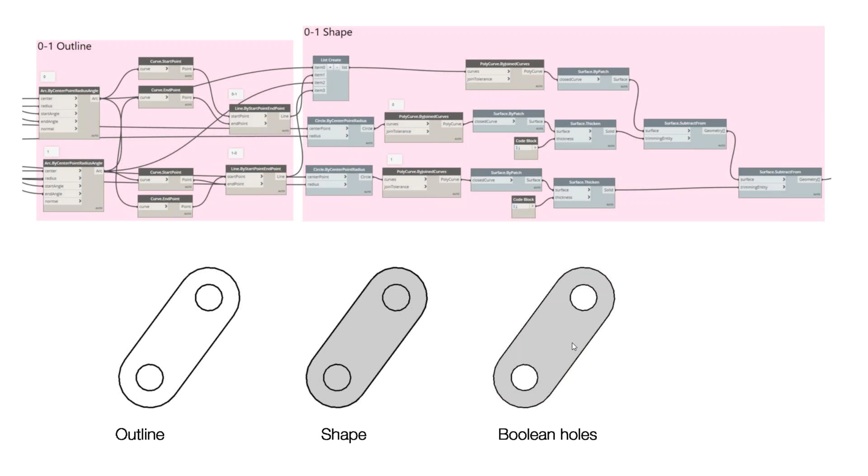So again, your input is your outline, and then you can create a shape from that. We had our little circles, you can extrude those up and then subtract them from it, and then you have your shape. That's just one of them.

Then the last step is you can apply color to it. Actually, the very last step is I have to translate it, because once I did all this with the 6 different things, they're on the same plane, so the colors in Dynamo look really weird.

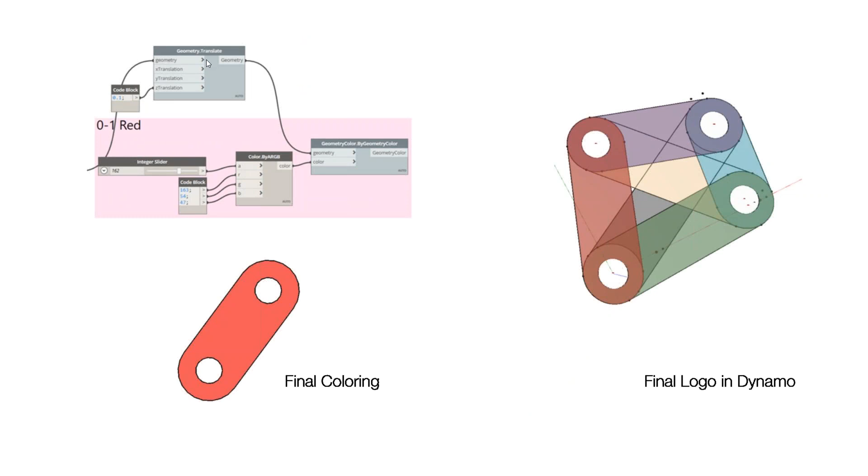So if we look at it, the full script in Dynamo, it's just 6 different lines. Here's your input, just those nodes, and your output is these guys. Things just happen to blow up in Dynamo, it's just the way it is. But as long as you can maintain an understanding of what each group is, it makes things a lot easier.

I take a lot of notes too, so just pepper those throughout. It makes it easier if you ever have to hand it off, which I haven't really done too much of, but if someone else is going to use your script, a computer coder will notate a lot in their code so that when someone else comes in, they can look at it. We have to approach this the same way, so someone can come in and easily understand it.

So then, what do you do? Where do you take this? One of the things I was looking at is what if you wanted to have more than 4 points? So my inputs were just these sliders that created the points, and they do work.

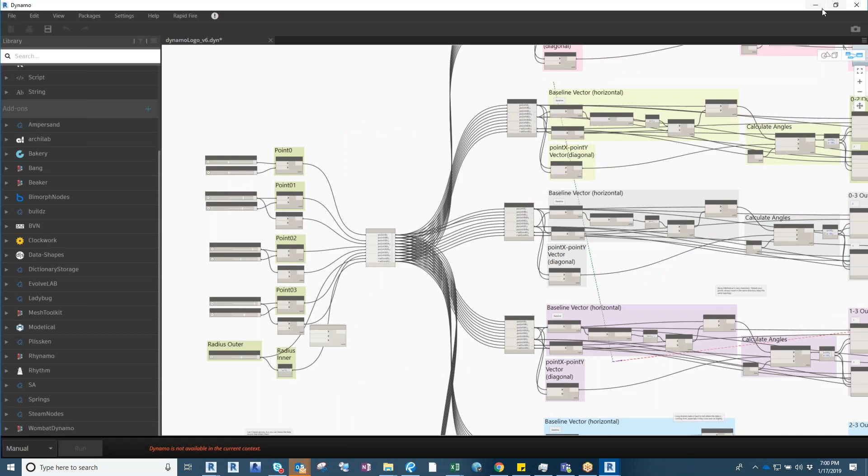If I run this... if you slide these, the whole thing moves around and shifts and everything. But what if you wanted to add points to it?

Could you do this in an easier way? It kind of is the same as the advanced strategies problem. Sure, I could add 6 more points and just copy things down and tweak them, but what if I wanted to keep expanding it? I'd probably have to rethink completely how the inputs go in. The output's pretty much the same, you're taking the line and then extrapolating from that line.

But if I could figure out some way of getting all these points and then creating lines, maybe I haven't done this, I'm just thinking, if I can create it where they only cross with one other line, because I don't want a line going from here to here. So how do you do that in Dynamo?

Not really sure. Just use a while loop and implement it, every time the loop runs. There's probably some filter too that helps you find out if things are crossing, you can filter those out if it exceeds 1 or something like that. So this is where I would explore to go, and just keep building that.

And then, what else do you want to do with it? So I took it and extracted it to CAD and created some laser cut pieces. We have an actual Dynamo logo in laser cut. I have one for Paul and one for myself.